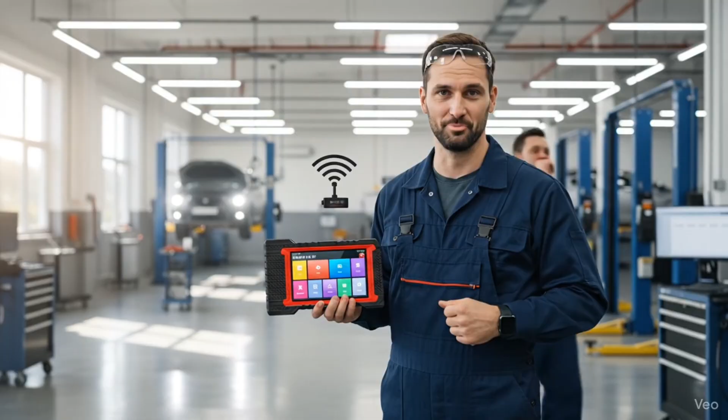Good thing is, what I like about this, it's got a screen recording function. You can just about see it there - a floating widget, if you like. You can move it about and do what you want with it. Like that, look, see, you can move it and do what you want.

And the good thing about that is when I'm doing my tutorial videos in the future, rather than me trying to film the screen with my iPhone, I can essentially show you picture-in-picture of the live data, for example. We'll look at the live data on Toyota - I'll go through a couple of things on the Toyota.

And like I said, with this you've got the option with the modules. As you can see there, we've got everything we need for the future - oscilloscope, Bluetooth battery tester, Bluetooth low energy BLE, printer, video scope, and tyre pressure.

Now, I've used the ThinkTool tyre pressure system - it's absolutely brilliant. The ThinkTool TPMS is one of the best on the market because it's so fast and easy to use. I dare say the Kingbolen is very similar. I'd be very interested to actually acquire all of these packages, apart from the video scope - I'm not so bothered about that. But I do want to see what it's like with the scope. I think that'll be nice once I get the oscilloscope going.

And now what I could do here, I can do a screen recording. So I think I'll do a screen recording and show you how that works, and I can do a picture-in-picture because otherwise it's going to be a pain in the bum.

User manual - very good user manual indeed. Android operating system, nice to know. Full comms, Bluetooth with our dongle, which you'll see on the Toyota in a bit. USB expansion slot - what else have we got?

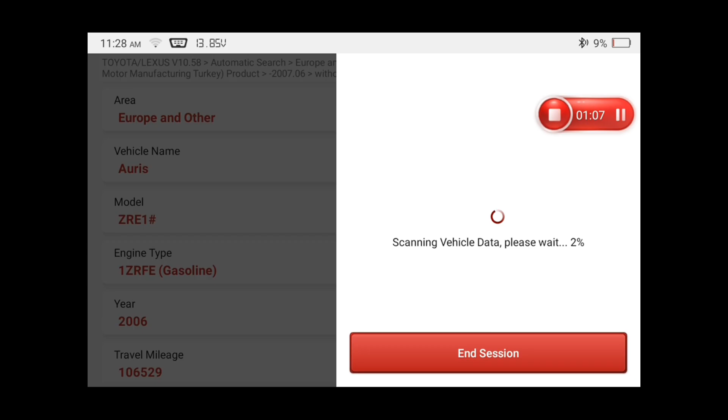Because it's a bit boring really, isn't it? All we're doing is we've plugged the dongle in, the wireless dongle, and we're just waiting for it to connect. Now I've put this back to, as you can see, normal system speed, just so you can see how fast the machine is. It's pretty fast, actually, it's a pretty good machine, to be fair.

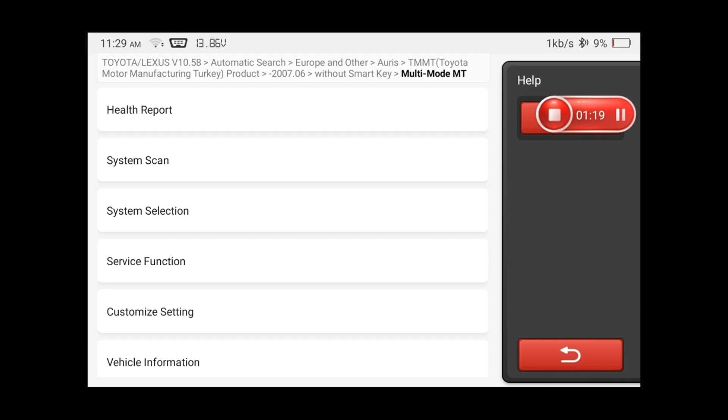So we have multiple options here - health report and system scan. I don't often do health report, it's the same on ThinkTool and all the others. I don't really find it of any use.

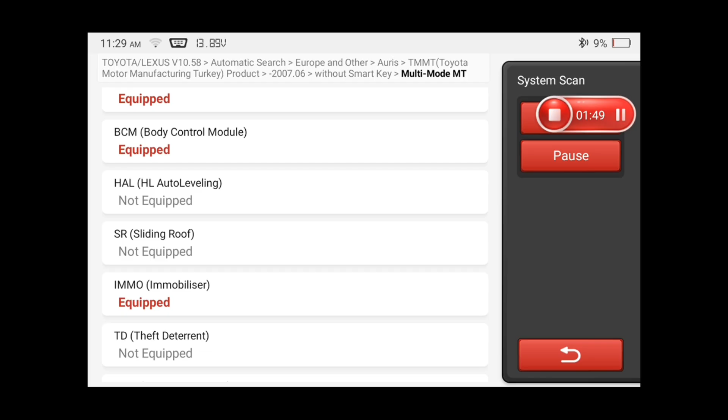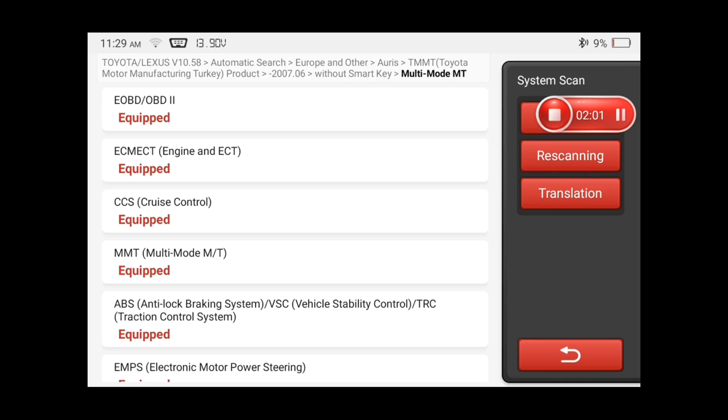But health report's pretty good, actually, because it will actually give you a vehicle tree of all the connected components and stuff like that, which for things like other systems like BMWs where you've got multiple linked networks, it's nice to see all the networks kind of linked together, if you like. And obviously we've got things where they're not equipped - it will smartly tell you things which aren't equipped, so you don't have to guess what's on the vehicle or not. It's pretty good actually, because you don't often get that with other manufacturers, not necessarily this type of equipment, like the older stuff on laptops, like Delphi and stuff. They wouldn't really tell you that a lot of the time.

Anyway, so there we are, we've got ignition coil problems, and it looks like it's on, I think, number 1 cylinder maybe - P0351, potentially. And it's basically, for some reason, it's done it 3 times, and like I said, it hasn't done it since. This was months ago, and it was just damp on the coil. So like I said, it's not going to be a fault-finding video, I'm just going to simply erase that. And it never came back after that anyway. Just damp because it was sat for 6 months outside, not running because we don't need the car anymore, we don't use the vehicle.

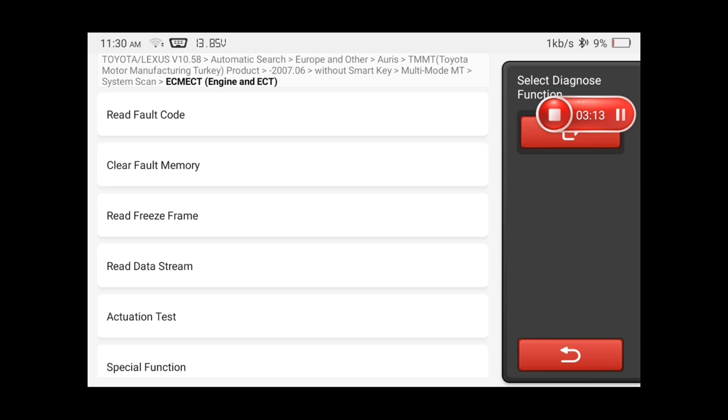So that basically erased it nice and fast, which was fantastic. And what I'll do now is go and show you a little bit of live data, just some data stream example. See how fast it loaded that? I think that's pretty goddamn fast. So we've got some voltages there.

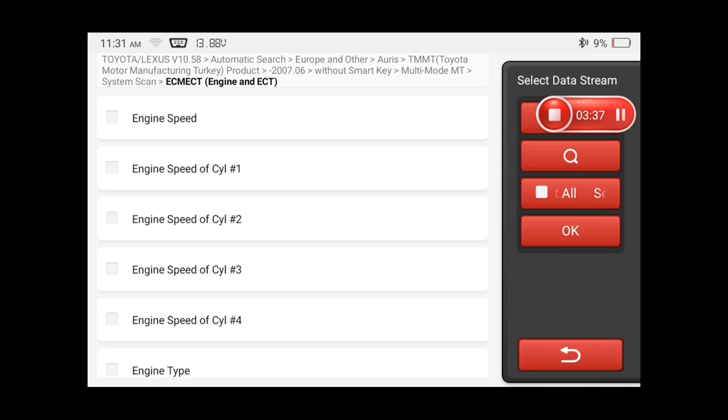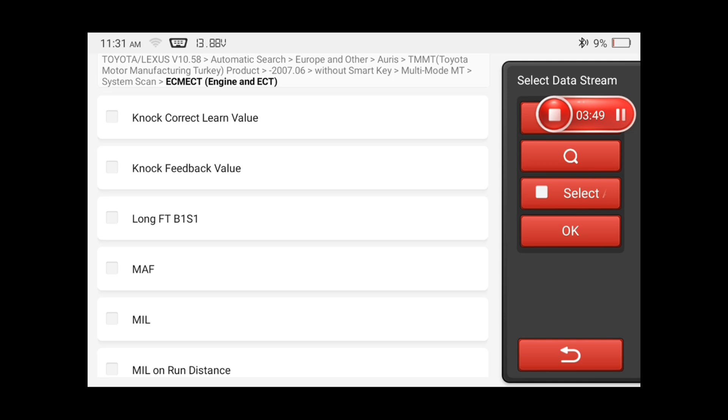Then I thought I'll click a couple of other popular engine parameters, shall we say - for example, lambdas and catalyst temp and stuff like that. I did notice an anomaly with the cylinder speed, but that might be purely just because it doesn't support cylinder speed, so don't worry too much about that. It's the same on a lot of other scan tools - the scan tool doesn't really know that this particular model probably doesn't support that. However, it does support quite a lot of other things. So as you can see, we've got a massive amount of stuff to choose from, which if you think about fault finding, sometimes you can get fault codes, or you might get a vague fault code, or there's no fault code at all, in which case you need to look at live data.

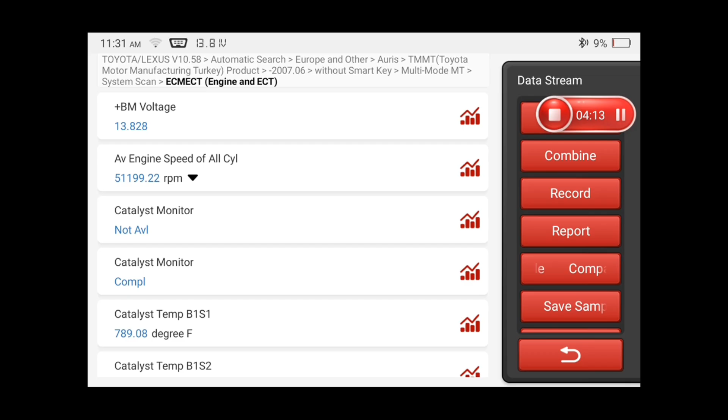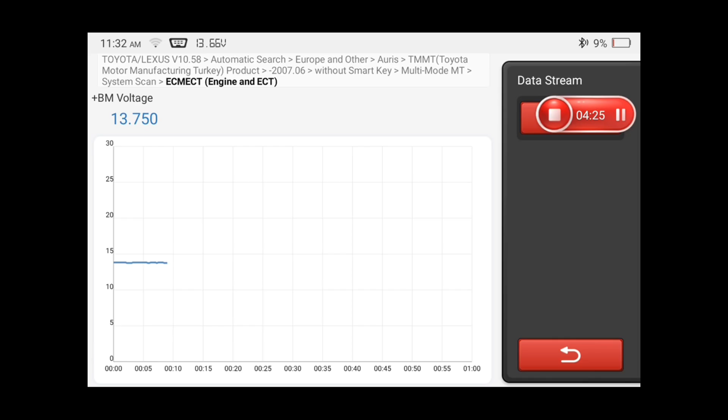Well, for me, there's more than enough live data there to kind of get an idea of what's going on. For example, we've got a complete catalyst monitor that's done its readiness check and everything's okay with that. Then we've got the voltage there. Voltage was a little bit low, wasn't it? 13.7, 13.8. Perhaps it's because the car's extremely old. Probably it's a little bit worn, the alternator.

And you can change that degree, Fahrenheit to degrees C, if you so wish. It just happens to default to that. There you can see engine speed, the cylinder's not really working at all, is it? So I'm not so worried about that.

I know we've got the knock values there. Crank angle, 22.062 degrees of crank angle. Knock feedback, -3 degrees of crank angle. So yeah, if you know what you're looking for, this type of data is invaluable.

And you've always got graph form as well. You don't need to rely on purely numerical data. You can put it on graph form and you can actually merge the graphs, combine the graphs as well, stuff like that. So we'll have a look at that now, I think.

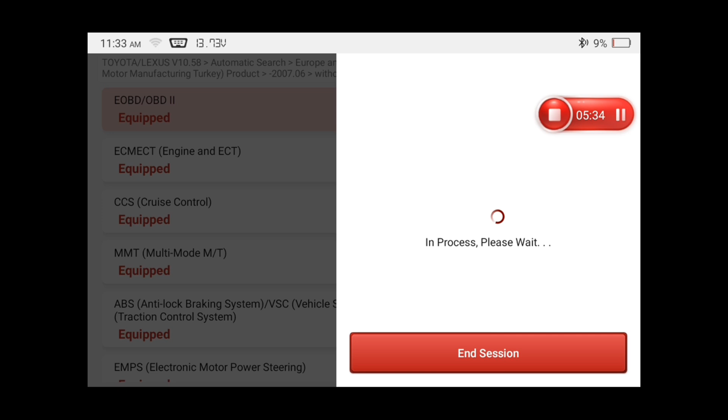And also you can look at the readiness data as well on here, whether the readiness is completed or not. And on this particular car, there's only 1 readiness completed and 10 not supported, because it is an old car, and it shows you it's ISO 15765 CAN bus as well. So again, it gives you the CAN bus data, which is handy, isn't it? You see how fast it got into that then.

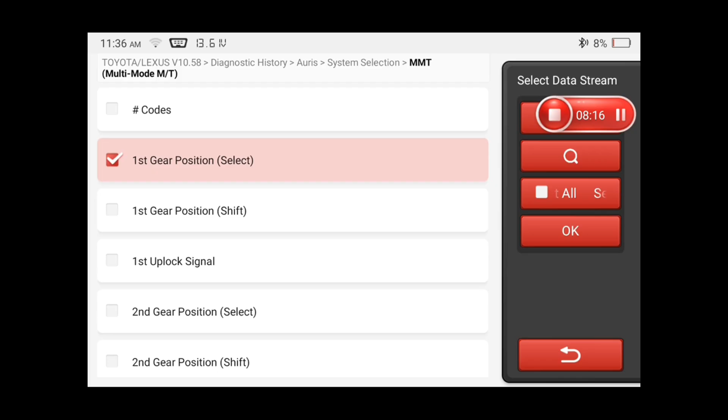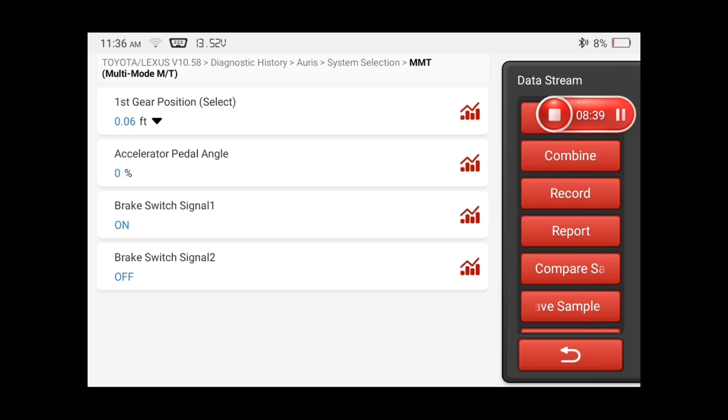So now we're in the multi-mode transmission, MMT, because it's semi-automatic. It's a manual gearbox with an automatic actuation system, a little box on top. But we can actually look at important things, because they do go wrong, because Peugeot used exactly the same system. I used to fix Peugeots. And to fix them, I needed a lot of data to get things working proper. For example, accelerator pedal angle. You have to test and check things like clutch progressivity and stuff, teaching the clutch bite point and stuff. So for data like this, it's invaluable.

And there's a lot of stuff on there, not just for the engine. And that really, to me, is pretty damn good, actually, if you think about it. For example, the brake system, we've got no fault codes, but I do recall some issues with the ABS light coming on every now and then. And if we look at this, presto, we've got all the data there. We can look at the status of the wheel speed sensors and the direction and stuff like that. And number of DTC, 0.

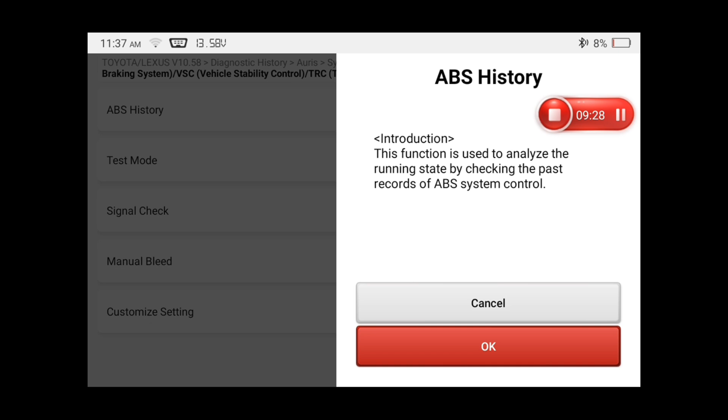But what's interesting about this is it does show past errors, which is quite interesting to me, because I don't really see that on BMW, unless if they've been erased. Well, this particular one does have ABS history, which is really nice. I'm new on Toyotas, I don't do much on them, but on BMW, yeah, there is a history, but if it's been erased, there is no history really, other than check control messages.

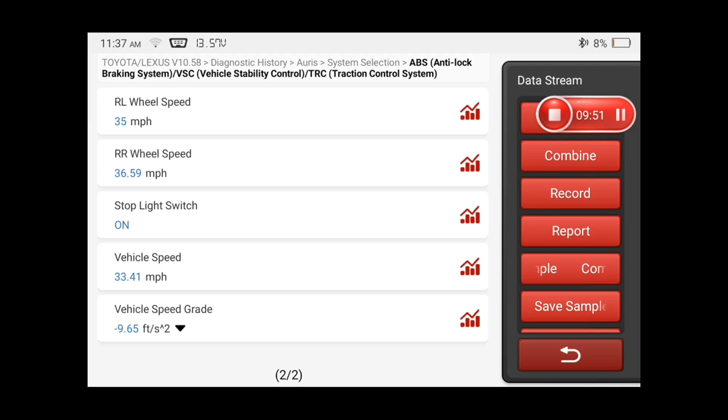But if you look at that, it tells you again, freeze frame data of what happened, when it happened, how fast the car was going and stuff like that. Vehicle speed grade, -9.65 feet per second squared. So yeah, it's crazy good really if you think about it, the amount of data what you can get out of this little tool. It's well worth the money.

And, you know, this is going to be the tool I'm going to use to do a lot of jobs now in the future. So, yeah, I'm more than made up with this tool.

Right, so we're going to have a real world test now. It's about -6 outside, a little bit of snow. I've got the Kingbolen. You can see now what I mean about the dongle, there's nowhere to put it. But it's a brilliant tool. It's frigging brilliant. Don't let that little thing put you off.

It's $300 frigging. I mean, when I started this job, not even 20 years ago, you couldn't get anything like this for less than $2,000. Now it's like less than $300. Are you kidding me or what?

Like I said, I believe in real world conditions. So there you are. It's a bit parky, isn't it? Let's hope the car's actually working, because, you know, I've had a few battery issues with it.

Right, let's get in. Is the handle stuck? No, it isn't. Right, let's get into the old Toyota. And it's bloody freezing. Let's fire it up, keep nice and warm, and then see what happens.

It's a bit parky, but I did say I'd do a real world test of this, because if you're going to be buying this for yourself... battery voltage is dropping, you see that then? Oi, oi, oi. That's -5 now.

Right, let's get the dongle in. If you're going to do a real world test, you might as well do a real world test, right? Otherwise, there's no point messing around, is there? Let's get our Kingbolen dongle.

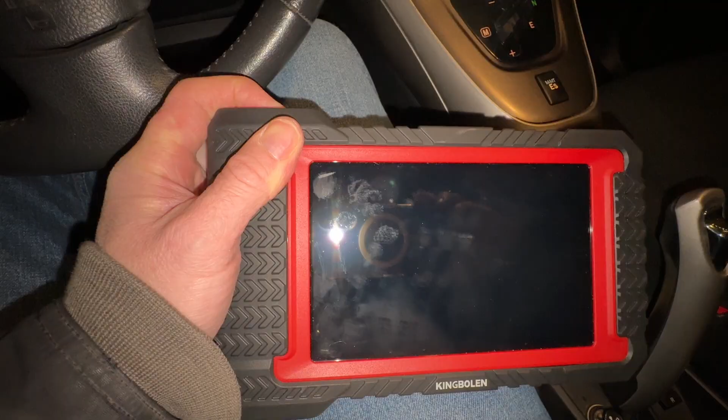Let's turn the old Kingbolen on. Yeah, we've got a battery issue with this, haven't we? I don't know if it's actually the battery itself or if it's just an issue with essentially a battery drain. I think there's a parasitic drain. That'll be good if there is, because I can make a video about that, can't I? Tell you one thing, it's bloody cold, that's for sure. Heated seats on it, on the bloody thing.

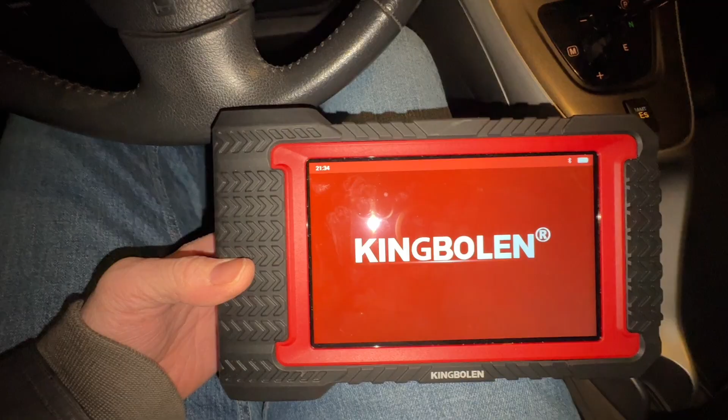Just let the Kingbolen boot up. I've had it switched off for a while. By the way, I've put on the video, you do get lifetime free upgrades for this, which is good.

Right, so let me show you how it works. So we go on to scan. Do you know what I might do with this instead of doing a screen record like I said I was going to do? Let's just do it this way, it's going to be so much easier, don't you think? Let's put it there on my legs.

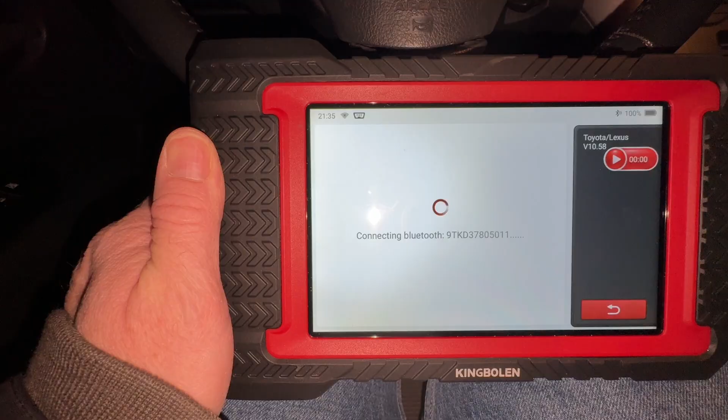Toyota. So it's connecting to Bluetooth automatically, which is nice, isn't it? And pretty much it should find it, I guess.

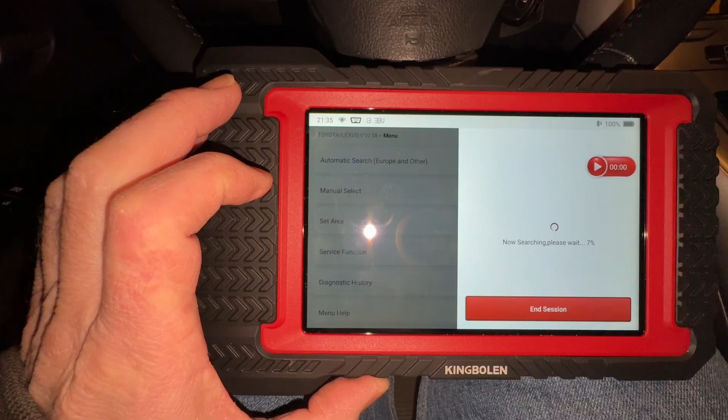Right, automatic search, let's do that. It's going to search all the vehicle systems on the car now. See, it's pretty fast, right? It's Auris, it's Turkey, I happen to know that, without smart key. It's MMT. And there we are, it's got all our data there. That's pretty damn good, isn't it? So we can press OK.

OK, and now we're going to just mess about with it. It's pretty fast, right? Health report. It's very fast. On BMWs it might be a bit slower because they're more complex, but yeah, it's pretty good.

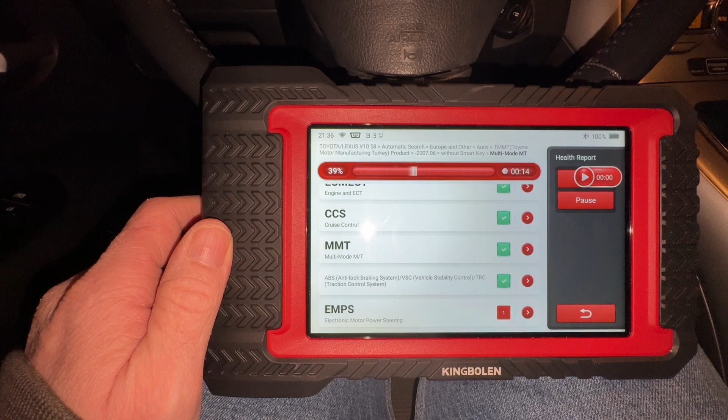You see now why I don't like the health report on any of these models. I just don't like the layout of it. It's like this on most of them, and it's just not my cup of tea at all, frankly. But it just tells you, power steering there, look. Probably because I would say there's an issue with the battery voltage, I'm guessing. I bet it says under voltage on there, doesn't it? How much do you want to bet?

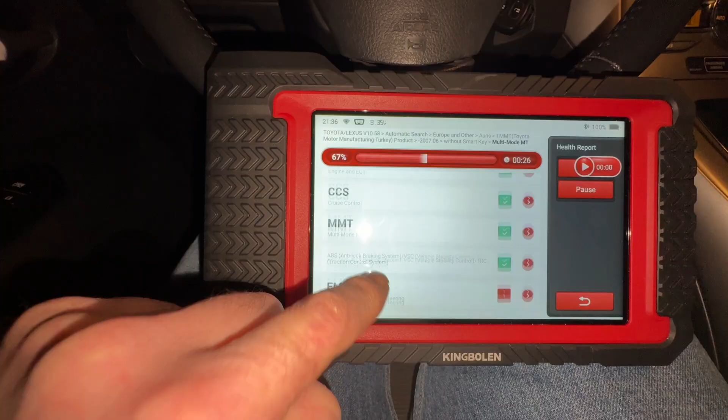It's a bit of a shitter really, isn't it, let's be honest. Aircon fault, and a fault with what? Power steering. Let's have a look at that. EMPS, electronic motor power steering.

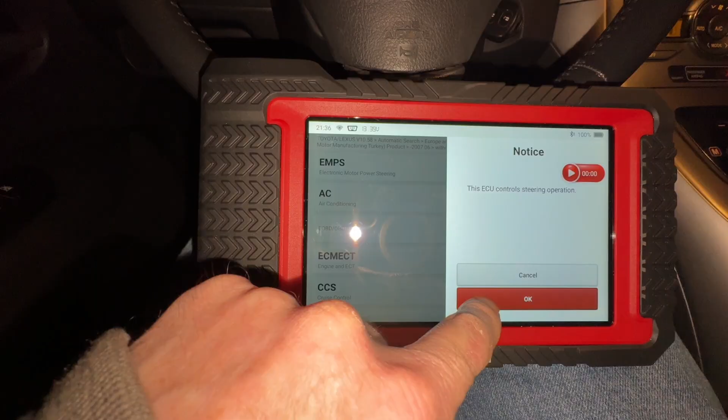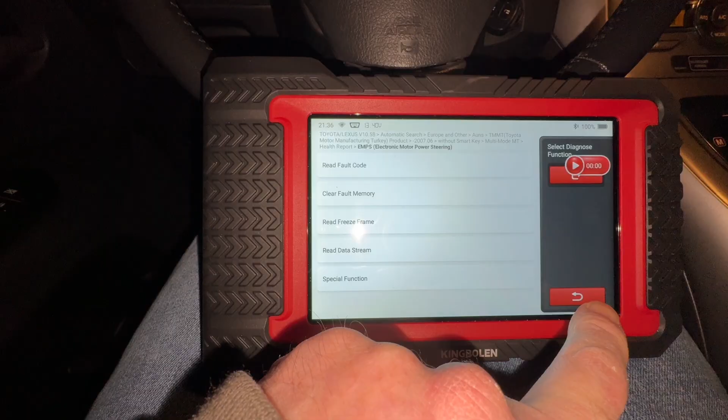Lost comms with ECM, CAN bus fault. Shit, that's not good, is it? I guess that's probably because it's got a battery voltage issue. So we've got a CAN bus fault there, haven't we? We can look at the data stream of that, can't we?

There's lots of things. Power supply, motor current, motor voltage. There's lots of stuff really we can look at there. Let's look at that.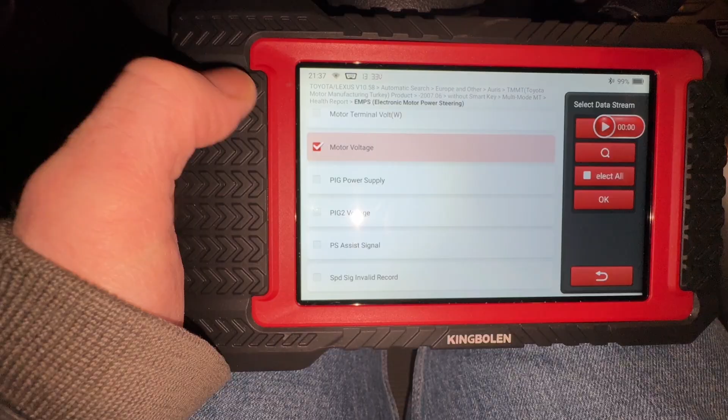13. It's not really charging very well, this car. You know, either we've got a voltage drop on this Toyota, or the alternator's buggered, because that ain't charging, mate, is it? That's 13.5 volts at -5. It should be well over 14 volts there. It was 13.7 the other day, if you recall, from the live data. Motor voltage 27 volts, I don't know if that can be right, can it?

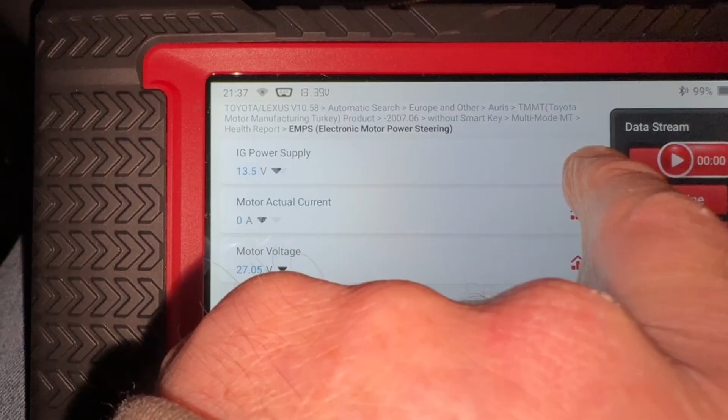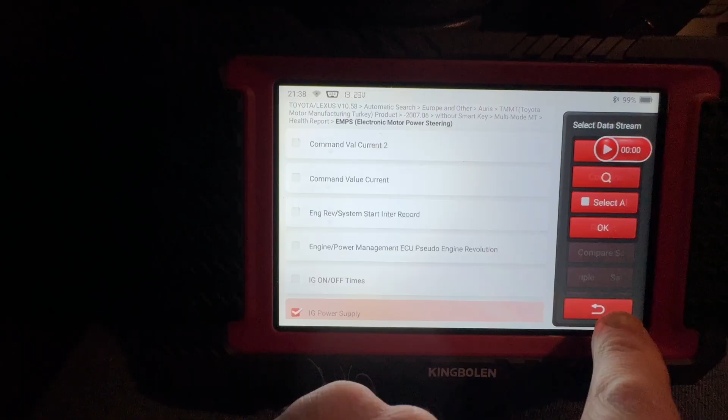I think that's a bit better. I've actually turned off the light. Maybe you can see it a bit better now. I'm not too worried about that.

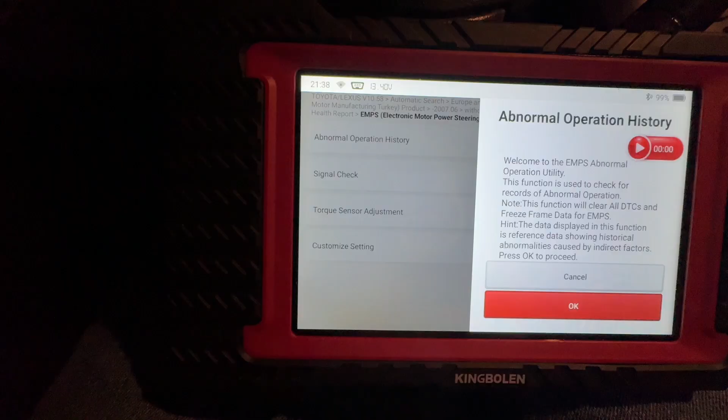Let's clear the fault memory on it. I think it's battery voltage related, that CAN bus fault, because there's obviously an issue in the special function. Torque sensor adjustment, abnormal operation history. You can do a lot with this, you know, really. Welcome to the abnormal operation utility.

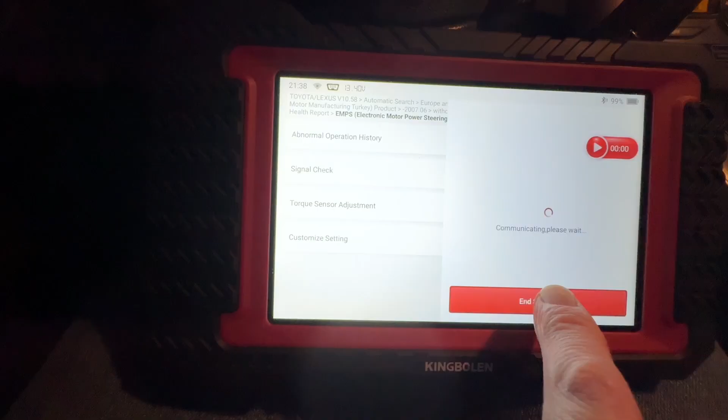Low power recorded, overheat recorded, engine rev fault recorded. Let's clear that data.

There's more on here than on BMWs. You don't normally get this much stuff on BMWs, really. So it's pretty good, isn't it? What else have we got on here? Air conditioning fault again. I must be under voltage, surely to God.

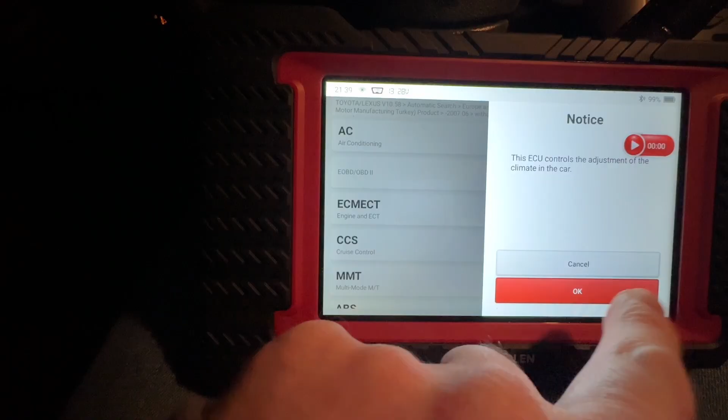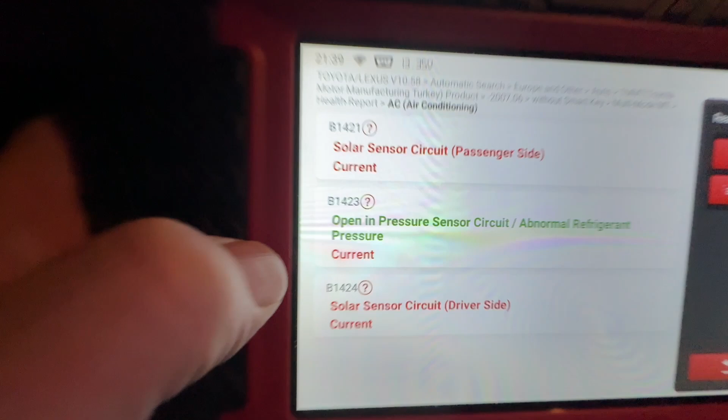Pressure sensor, abnormal refrigerant pressure. Open in pressure sensor circuit. That's not good, is it? It's a current fault.

Again, I think that might be battery voltage related, because if it was faulty, we'd have an issue, wouldn't we? Look at the data stream on that.

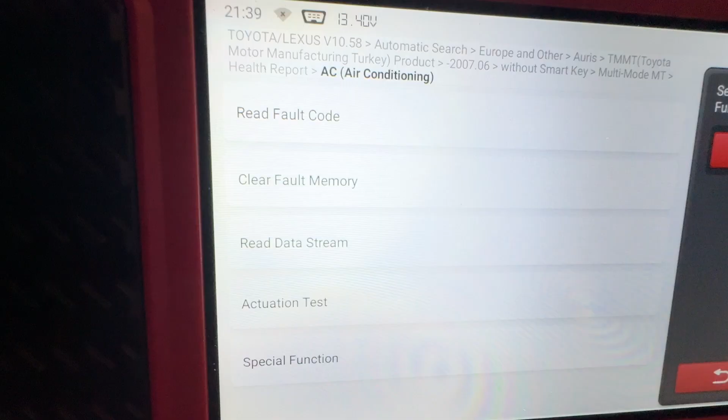This is what we're on to now, a fault finding job, and I didn't plan on this really. Let's look at the pressure sensor. Have we got anything else? No, just pressure sensor, control current.

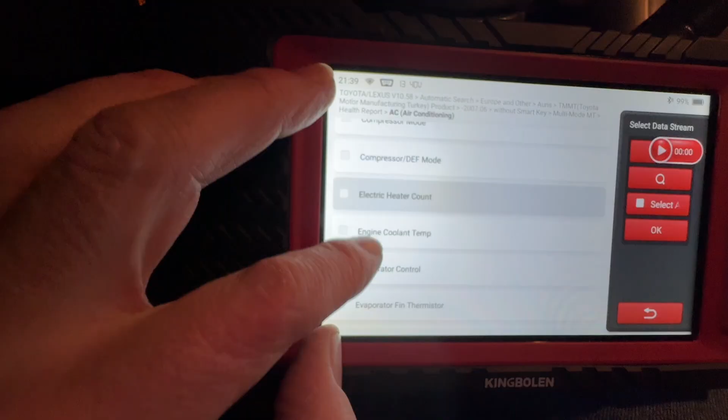So regulated, it might be a swash plate system on this. I've no idea, I don't see anything at all there for compressor mode. I don't see anything for clutch, do you? So I guess it's a swash plate system, variable displacement.

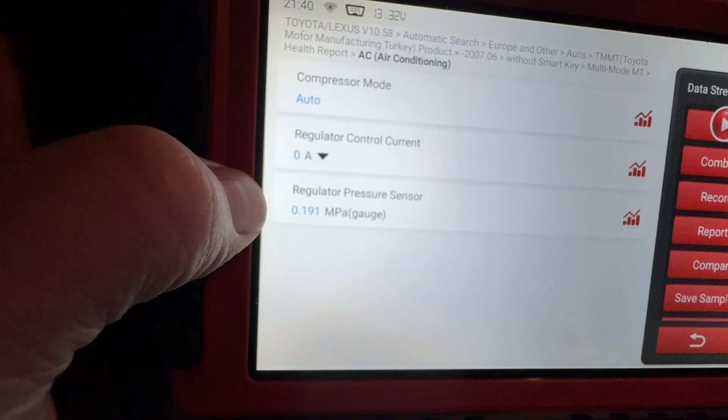Regulator pressure sensor, I don't like megapascals gauge, so let's do something different than that. I think we can do that. If we go back now, I thought I might be able to change the unit of measurement, megapascals - I'm not keen on that.

Right, let's turn on air conditioning, which is that one. Let's see if it has an effect. It's not done jack shit.

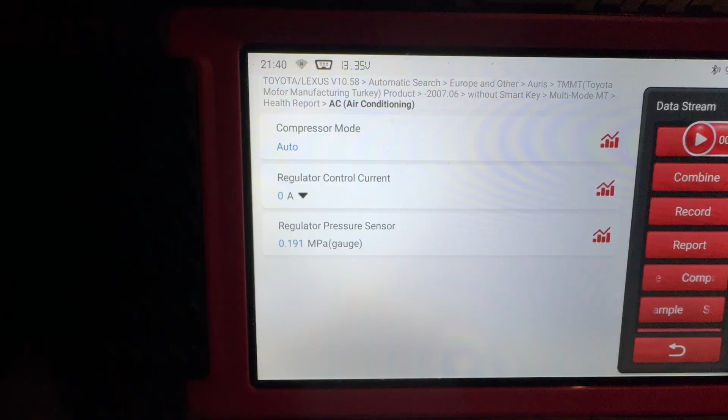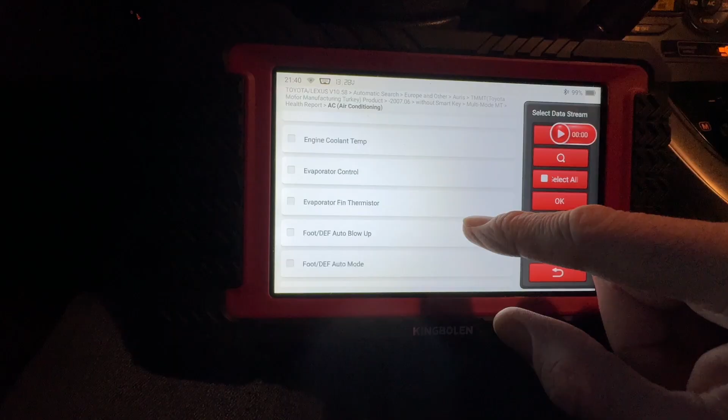So maybe we've got a leaking air conditioning system, or we've got a knackered compressor, maybe there's no gas in it. I can easily check that, can't I, by just putting a screwdriver in the refilling port and watching, you know.

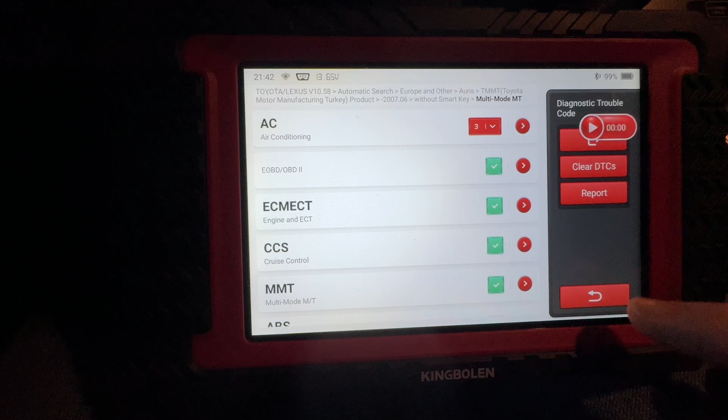That's okay, isn't it? So let's come out of this completely, because I told you I don't like that. I prefer a system scan. I just prefer to do a system scan. This is just how I use these type of tools.

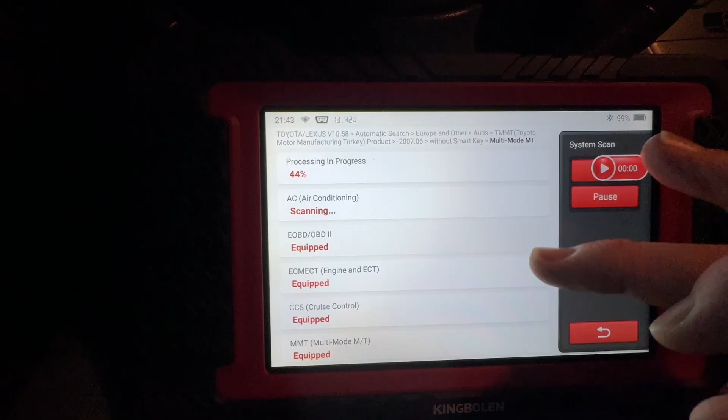Again, notice how fast it is. It's pretty damn fast, isn't it? I just don't think you'll get anything for $300 out there that's as good as this. If you think about the launch one I had before, which I've still got, it's locked to BMW essentially.

And not only is it locked to BMW, it doesn't do any of the manufacturer stuff, but it's wired, and that's €200 - I think now it's a bit less. So I don't understand, I don't think you'll get anything this cheap anywhere, really, on the market.

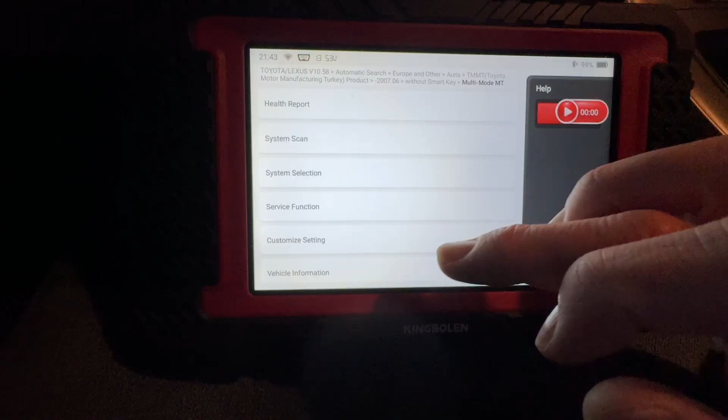So it's just saying it's equipped, but you'd have to go into them to see what the situation was. You can do, obviously, system selection and go into individual system.

That'll detect all the different service functions, like if you need to reset stuff and things like that. So this will tell you on each system what you can and can't reset, essentially, which is pretty good, isn't it, if you think about it?

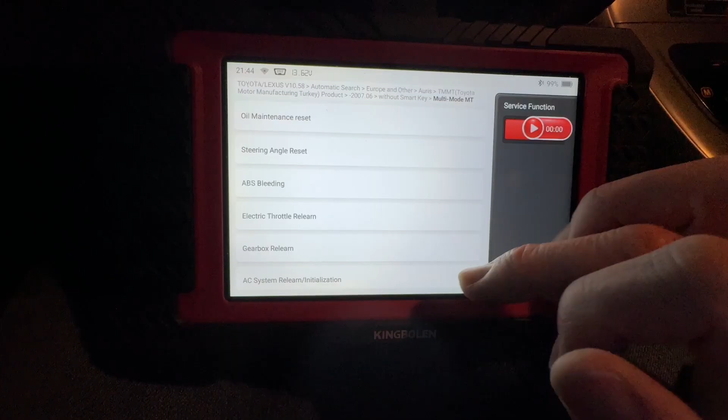So that's pretty good, so there we are. There's not much, is there? Gearbox relearn, which is good because it's a multi-mode transmission. Steering angle reset, which is handy. ABS bleeding, that's good. Right, let's look at what else.

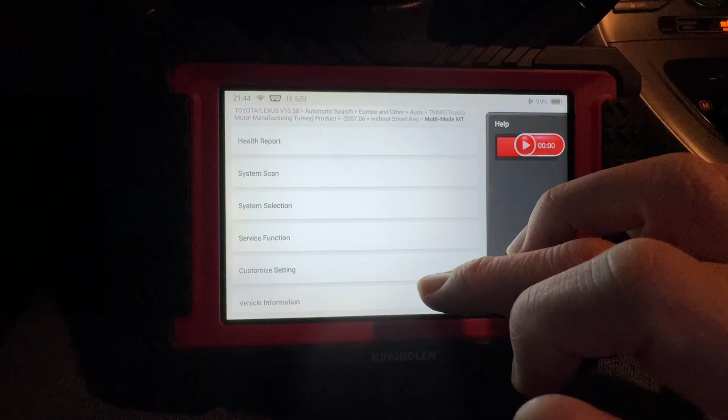Customise setting, let's see what that does. It's idling quite high because it's still cold as well, isn't it?

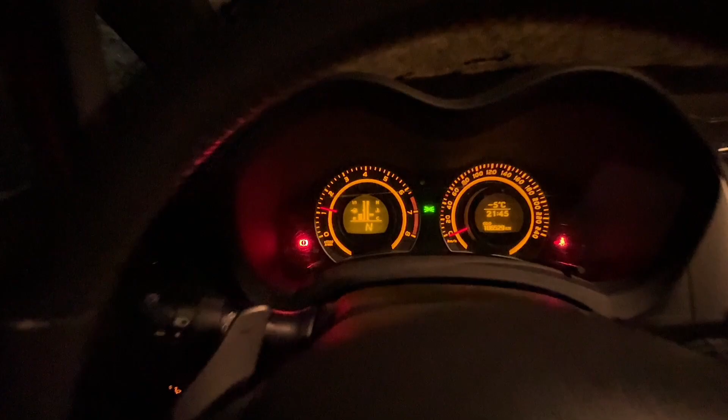What else have we got on here? To be honest, there's that many functions on it, I could do like a two-hour video on it at least. Security door lock, wireless door lock, air conditioner.

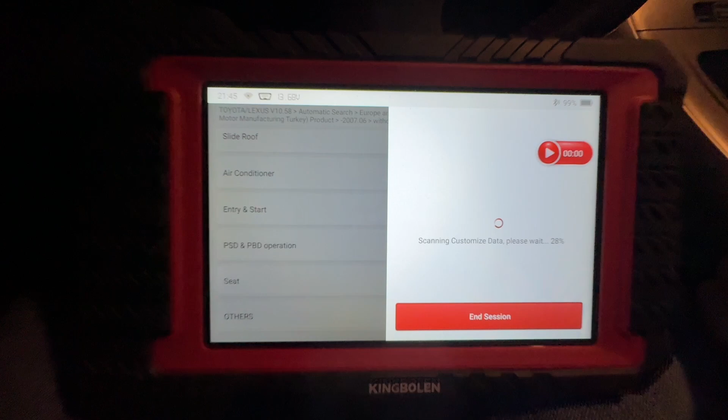Let's see what's on air conditioning. Customizing data - I don't know if this is like sort of programming, not programming, coding. Maybe some sort of coding, that'd be handy, wouldn't it? Yeah, the evaporator, compressor mode, set temperature shift, compressor mode, automatic.

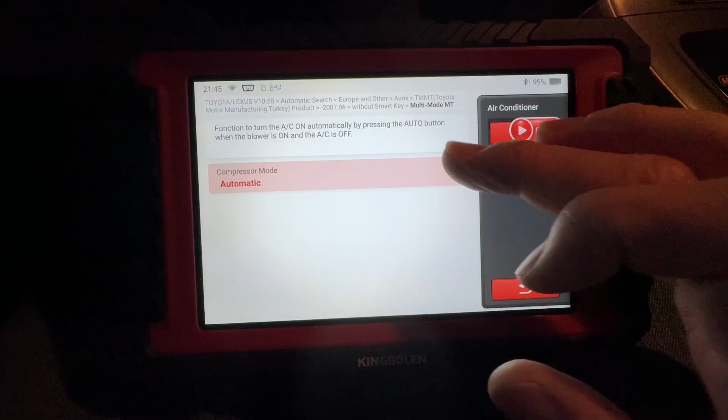Okay, so you can actually do some sort of coding on here, which is handy, isn't it? What else have we got? Ambient temperature shift - function to control the shifted ambient temp against the display ambient temp. Normal shift. So this is pretty good, actually.

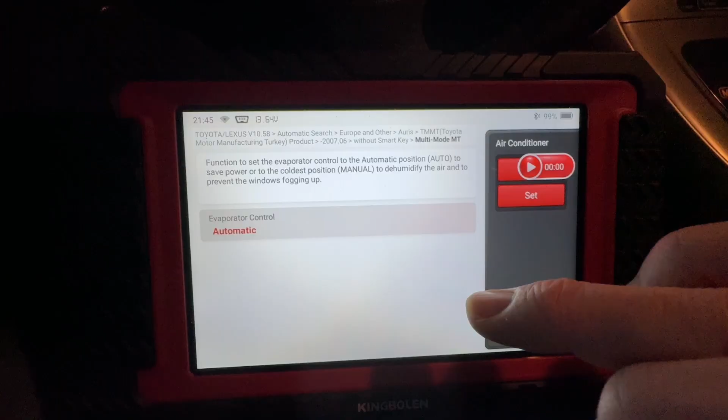Evaporator control, automatic. So yeah, you can actually modify this and change it, I guess. There's certain things you can do. So yeah, that's pretty cool as well.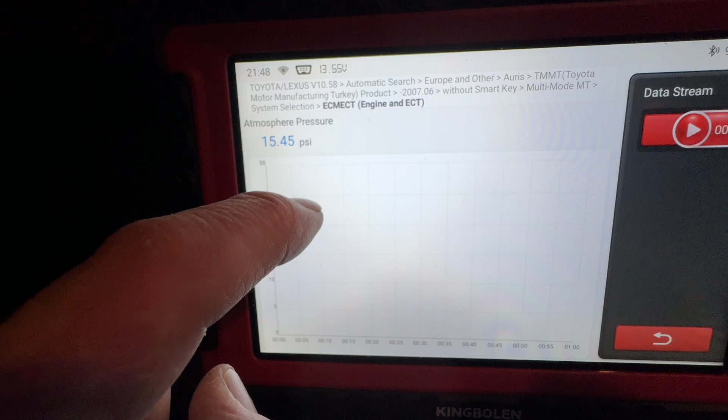Need to see if I can change that - atmospheric pressure. I'm pretty sure if you do that you can change it, you should have a drop down menu there, I'm pretty sure. So I'll have to learn how to do that. Anyway, 15 psi atmospheric pressure - it's 14.7 psi to 1 bar, so that's pretty high, isn't it?

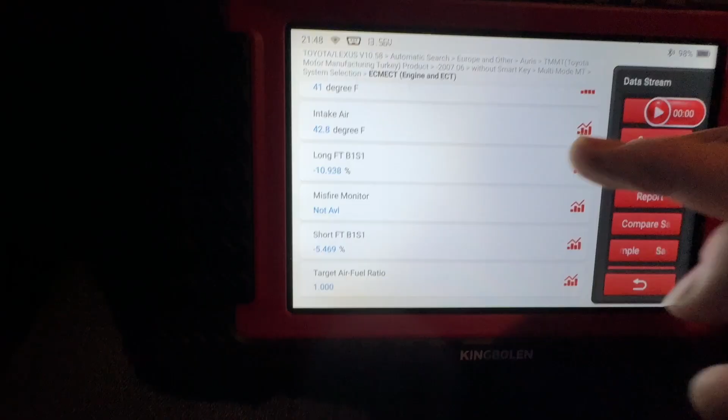Coolant temp. Misfire, long-term fuel trim minus 10%. It doesn't surprise me it's trying to reduce the fueling on this, because I do think it's got leaking injectors. Look at the short-term fuel trim as well. We've got issues with this car, haven't we? It's not fueling so good. It always stinks of petrol, this. So yeah, there are issues with fuel trim, isn't there?

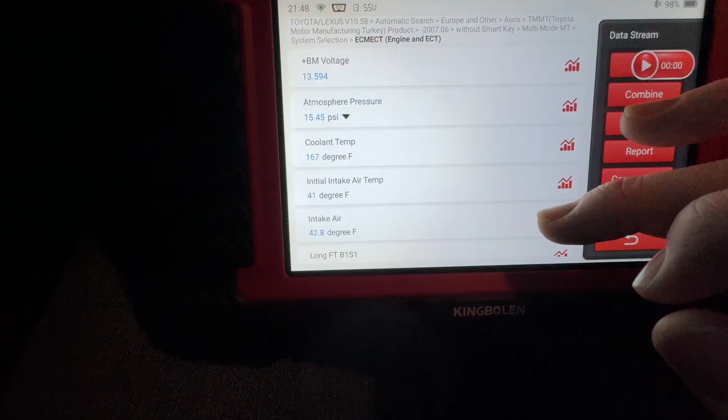Battery voltage is too low as well, look. So yeah, there's a lot of problems with this, isn't there? I think we need to look at the battery voltage. Maybe the battery's goosed itself because it is old. So we need to look at that, don't we?

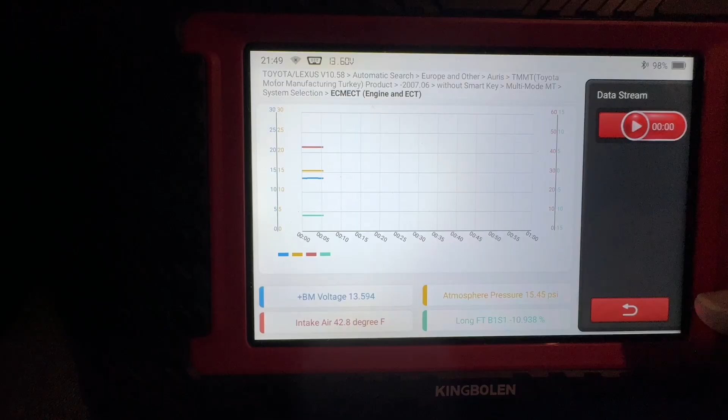We can graph them as well, combine them into one graph if you like. Maximum 4 data streams on this particular one. So we can combine them into one big graph like that. Now, I'm not really a fan of that unless it's something related, but still, it's not bad, is it?

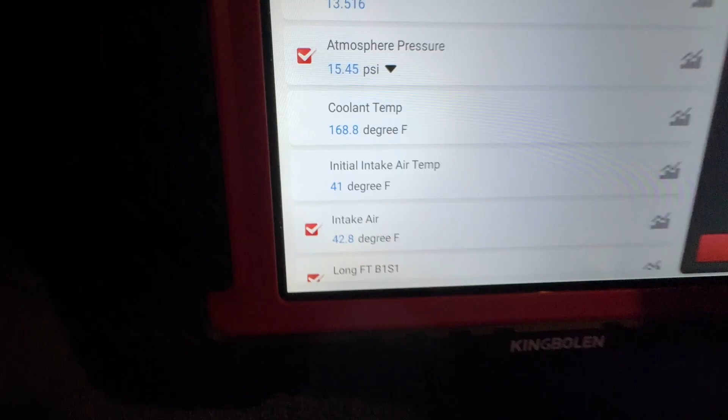See, the atmospheric pressure should stay the same, but the fuel trim will change as I'm revving it, of course. And the intake will change as well. Fuel ratio is 1, lambda 1 of course, target. Let's come out of that and look at something else, maybe - let's look at calculated load, coolant temp.

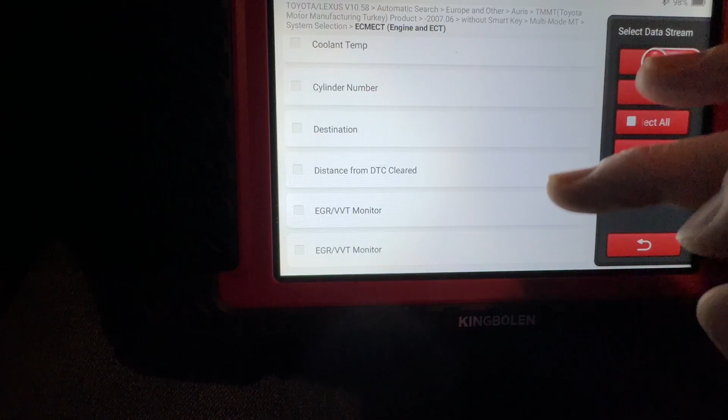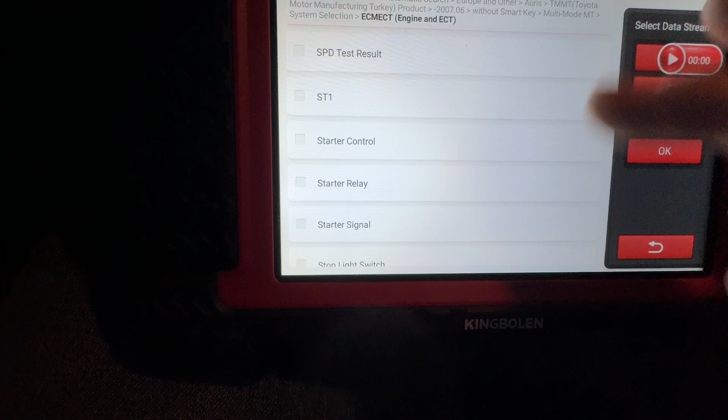Oh man, there's so many. Let's look at throttles - throttle duty. You can hear obviously it's responding with the current. You can see the current, throttle current as well. That could be quite an interesting bit of live data, that, you know. So let's look at the throttle motor current.

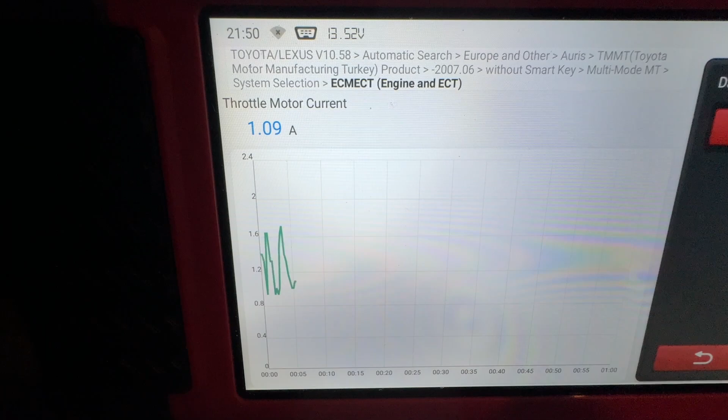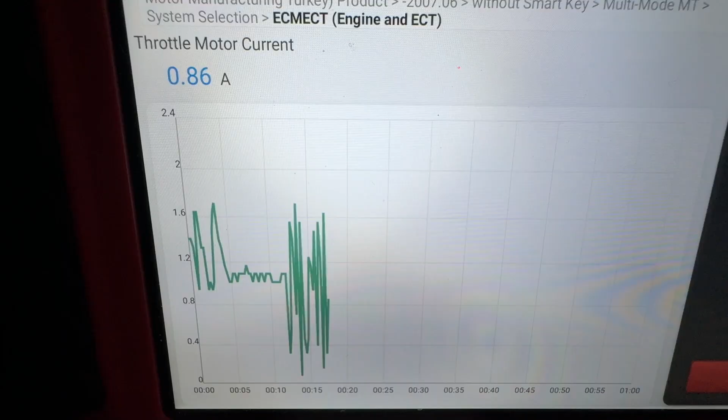So when we rev it, we can look at the current. It's doing some twittering, that, isn't it? But this is kind of live data, what you need, and this is really invaluable. See that initial drop in current there, and then it's dropping down, then it's going up. It's very accurate, that - if that's as accurate as what it is, then that's a very good display, isn't it, for throttle current? Again, all useful things for fault finding, aren't they?

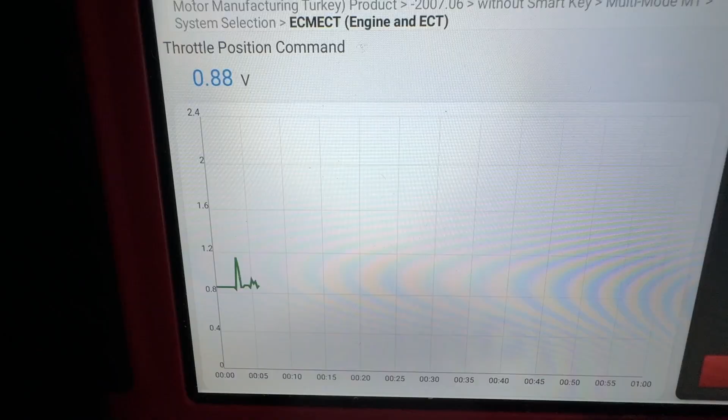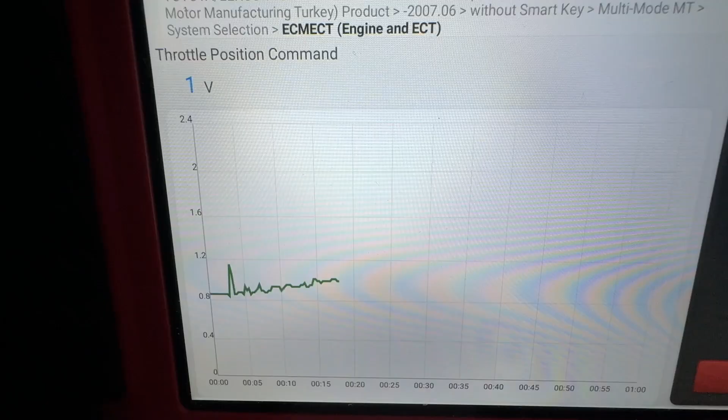Throttle position, feedback. Pretty good - that's pretty good for throttle feedback, isn't it? So there you are, that's about it.

I thought I'd do a nighttime test just to show you it's not like it can't cope with bad weather, which it clearly can. And as you could see, some good live data. I only have one criticism - there's nowhere to store that, and you're not always going to want to carry that big box with you. But that's my only criticism. Other than that, I'm really glad I've got it. This will be a tool I'll use because it's really good, and I think I can trust the data on it.